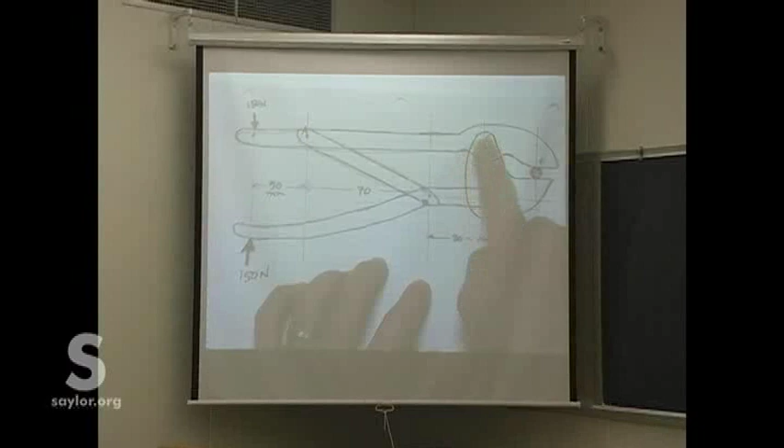I think we looked at that first, the lower part of the jaw here. Remember, what we're trying to find is how much force is exerted at E based upon an input back here by the user of 150.

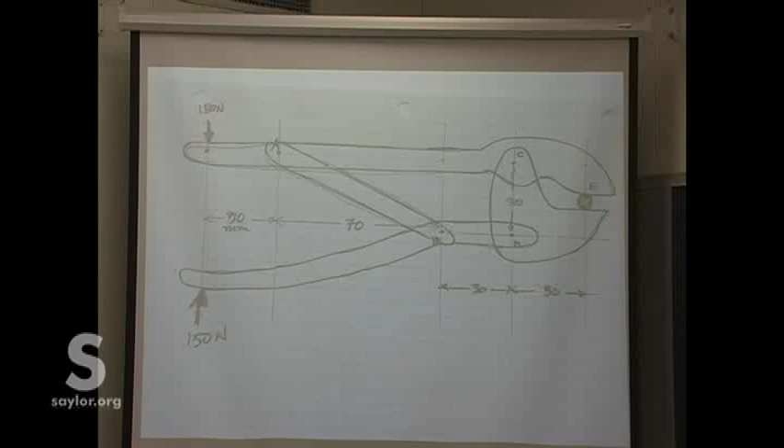So that's the deal, right? We looked at the first jaw. We did the upper part too, but we were just starting on that. My recommendation again is that you keep these parts, as you take them apart, in about the same place where they lie in the machine. You're just less likely to make a mistake then.

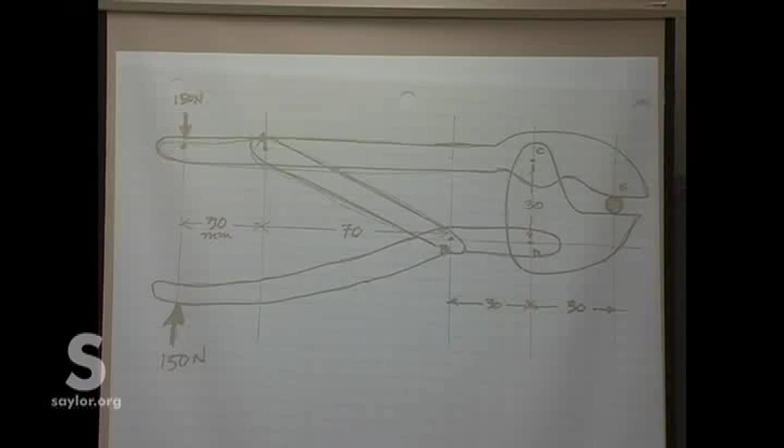So we had C and D, and we're looking for how much force it exerts at E. And we couldn't get to that because we had too many unknowns on this original piece we look at, the lower jaw. I think I put the forces like that, is that right? Remember, for the most part, it's not too crucial. Think about it a little bit, but don't waste too much time trying to get the little individual directions, because it all comes out in the wash anyway.

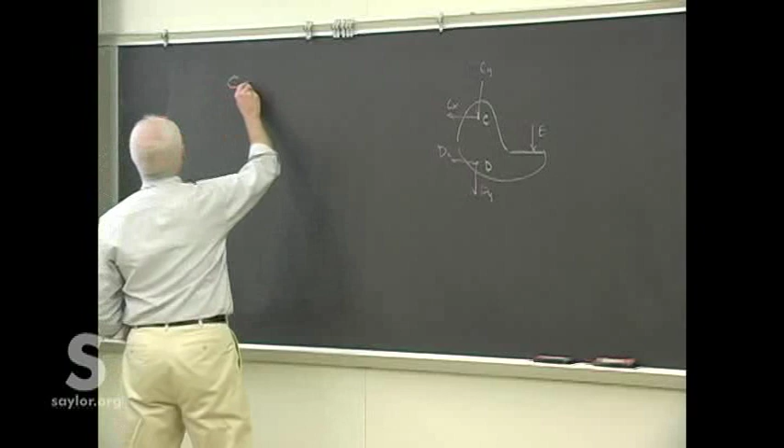All right, so now we're looking at the upper jaw, the long handle here. Oh, this thing's beautiful, you just gotta love it. And then we've got point C there again, and there's the other side of E. So we'll turn around because it's equal and opposite to whatever we've got there, and we don't have those yet.

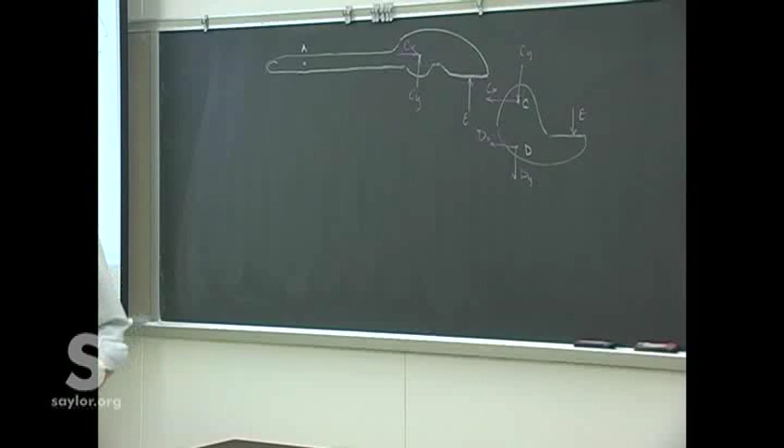So we don't have that. And then I think we talked a little bit about what was going on at that link A, the pin A, which is about there maybe. What was the deal with that one? We figured out a little bit about it, the forces that are there.

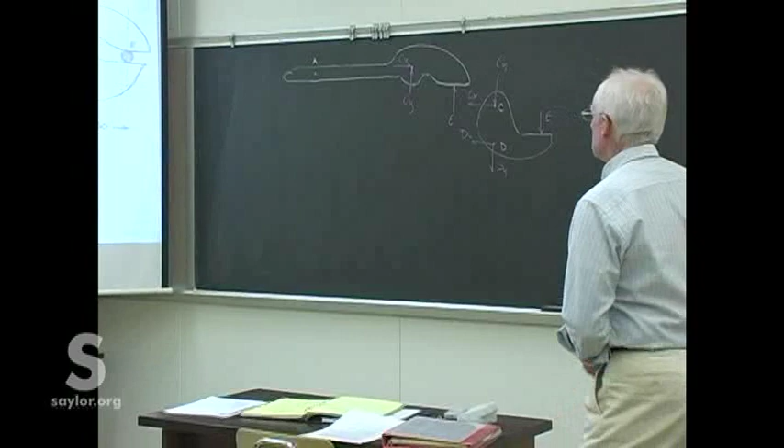It goes through the member AB. Yeah, that's a pin connection with a two-force member, which means we're going to know the inclination, I guess you could say, of that piece, because AB itself is a two-force member. So we know that the forces are going to be lined up right along there.

It doesn't mean when you go to analyze the forces at that point, if you need to, that it's not still useful to break them into their component directions. What it does mean, though, is that there's less, not the same number of unknowns that we might have had otherwise, because now we know the direction of AB. So you can still break it into the component directions if you need to, but those are related by the sines and cosines of the angle anyway, so it's not really anything we would have done differently. It's just fewer unknowns now.

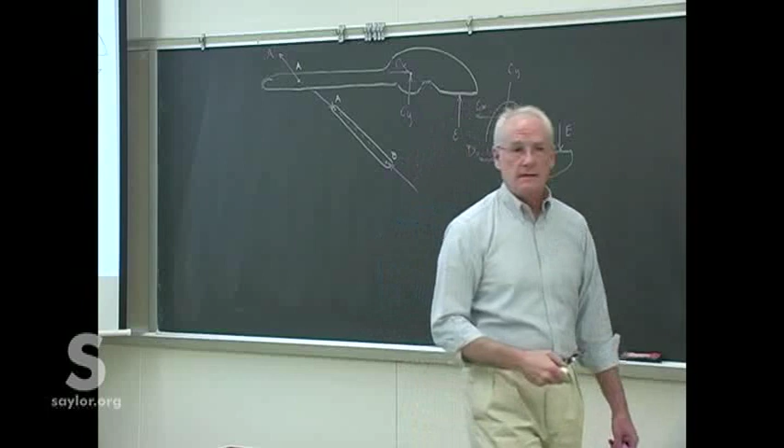All right, so I think that's where we were. Oh, there was the 150 input load there. We're trying to find out, given that, how much force is exerted by the machine at its contact with whatever it is that's cutting through it, at point E.

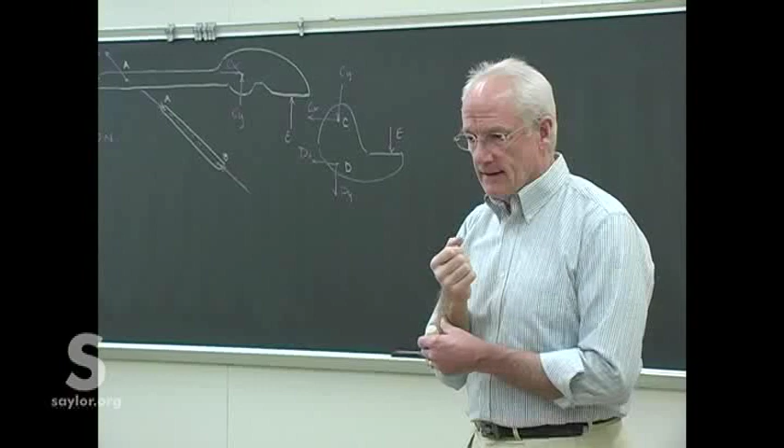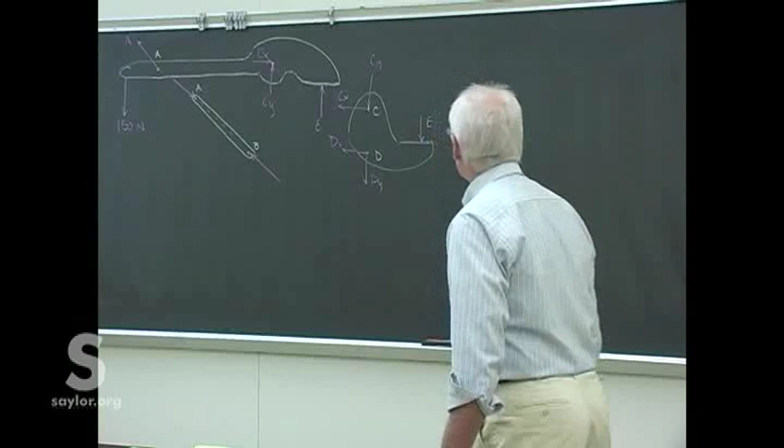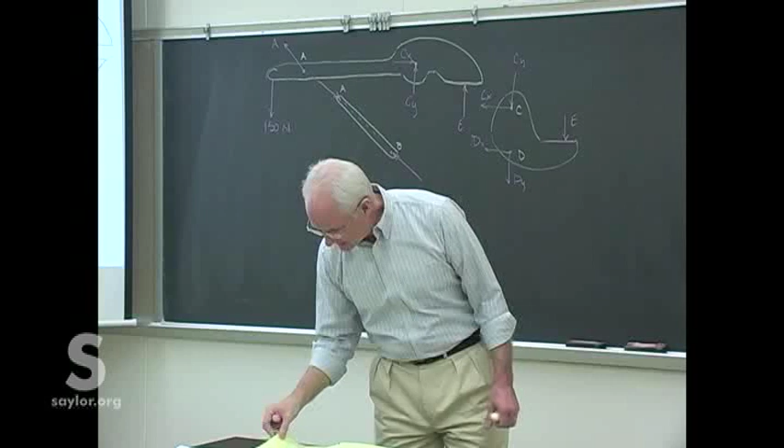So what's next? We have still 1, 2, 3, and 4 unknowns. That angle's not unknown anymore, but I think it's 23.2 degrees.

So we still have 4 unknowns with that one still: E, the direction and magnitude of C, and the magnitude of A is still unknown. So we can't do that piece yet either.

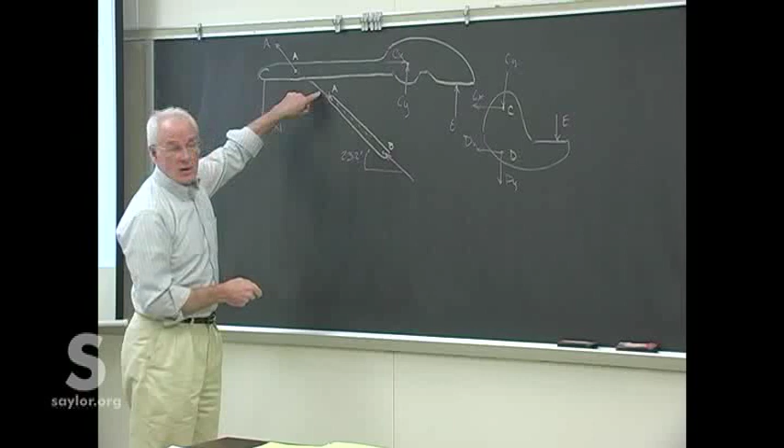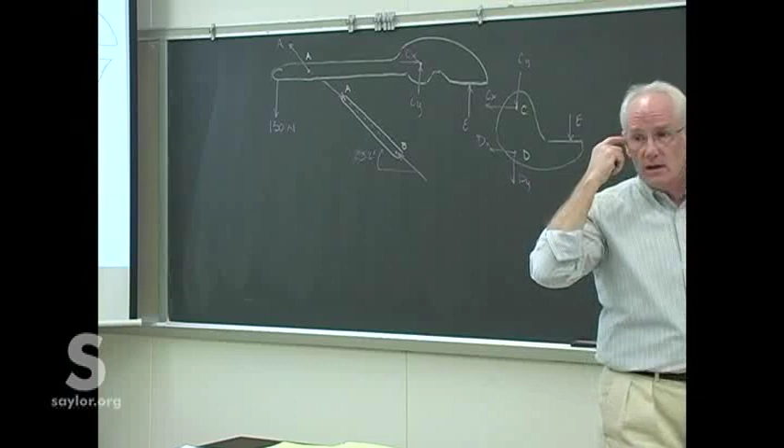So what? Do the last piece. There's only one unknown with part AB, right? We just don't know the magnitude, we know the angle. So can we do that one? Because if we knew A or B, we know that, we'd only have 3 unknowns. We could finish the part with the top jaw.

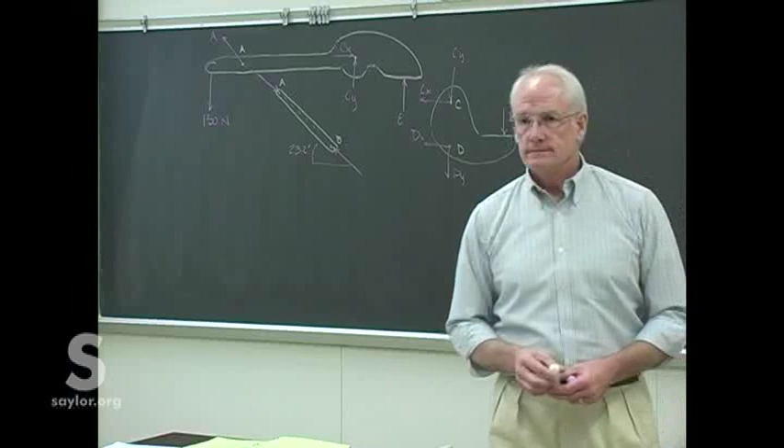Can we do part AB with only a single unknown? All we get out of AB is what we already know anyway, which is that these are equal and opposite. We don't have a moment equation we can apply here, remember? So the only two equations we have are the sum of the forces in the x and the y, and because of the nature of this, those aren't independent. So we don't have anything else we can do but say A equals B.

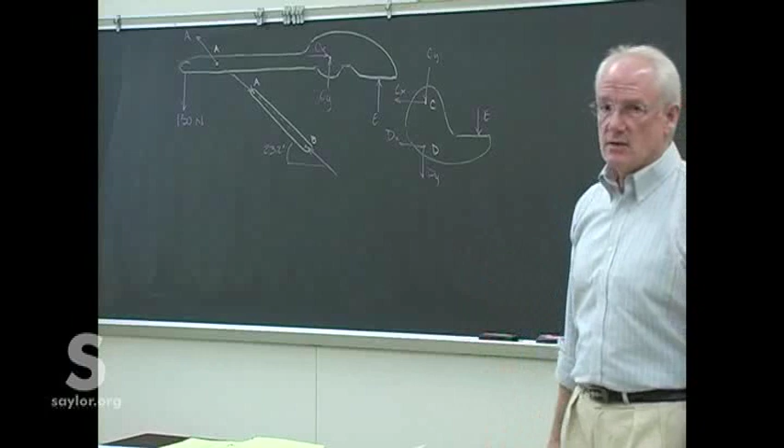Can you treat the top part of the handle as anchored and then just do a moment with the rest of the structure?

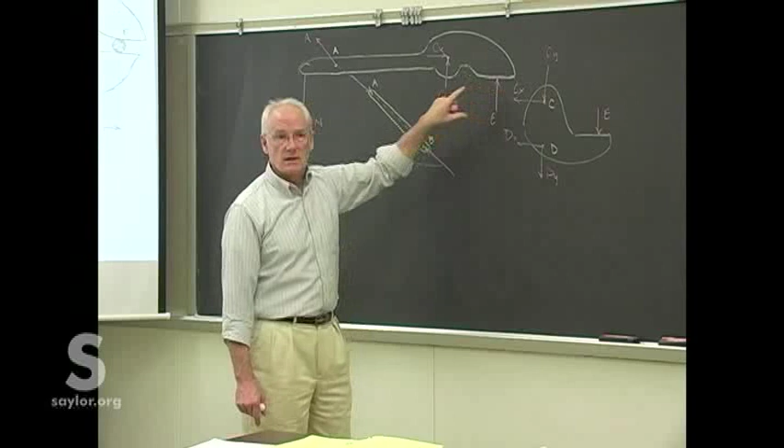Treat this as what? As if it can't move, and then just do a moment with everything else? Well, the parts can move, but we're not analyzing them while they're moving, so none of these things move anyway. We can take the moment about any point we want. We're looking for the static analysis with that load. What's the force here? Even though the parts can move, they're not moving.

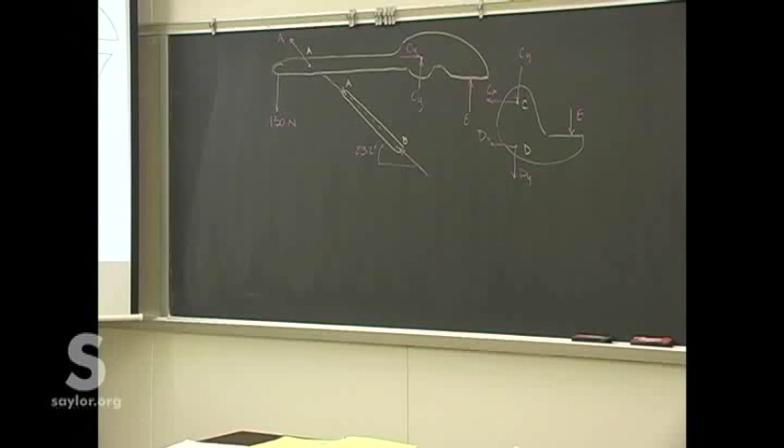I was saying use the 150 newtons with everything but the top piece and do a moment about C, and then you can get the force at A. Everything but this? Yep. And then use the other three pieces as if they're rigid, and do a moment about C, and then you should be able to get a force at A, right? At least get the Y force at A.

Do the moments about what point? C. But you still have forces at D, B, A, and E.

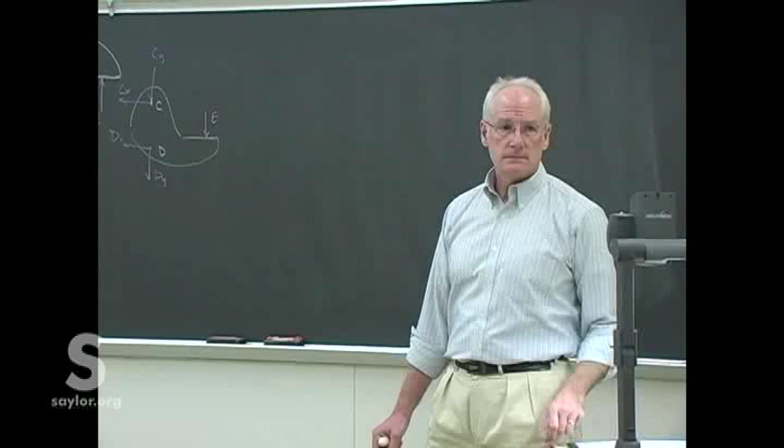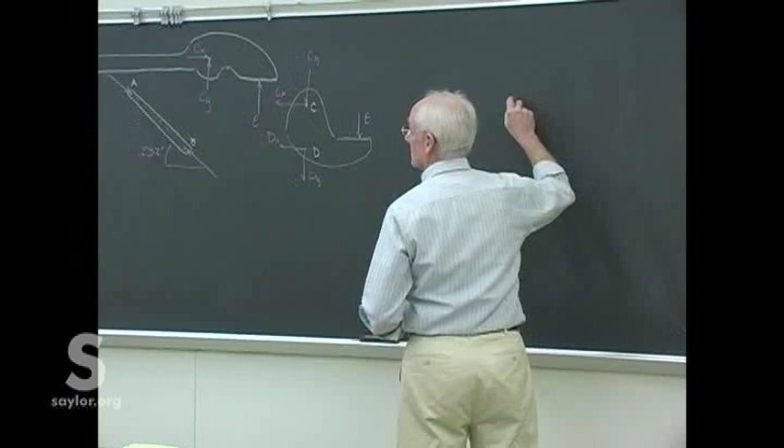Those are unknown forces. I'm just saying use the known 150 newtons to create a moment. But maybe, all right, let's see. I have to draw it to see. Okay, so we've got the lower piece, we've got the link, and then we've got the lower jaw.

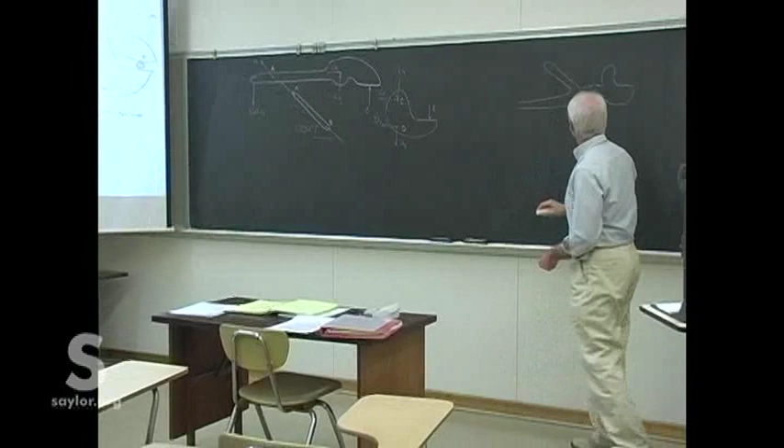So just something as beautiful as that looks, right? Yeah. So we have the 150 there, we have E there, and then we have the forces at C, and just the force at A. Right? That's what you're saying?

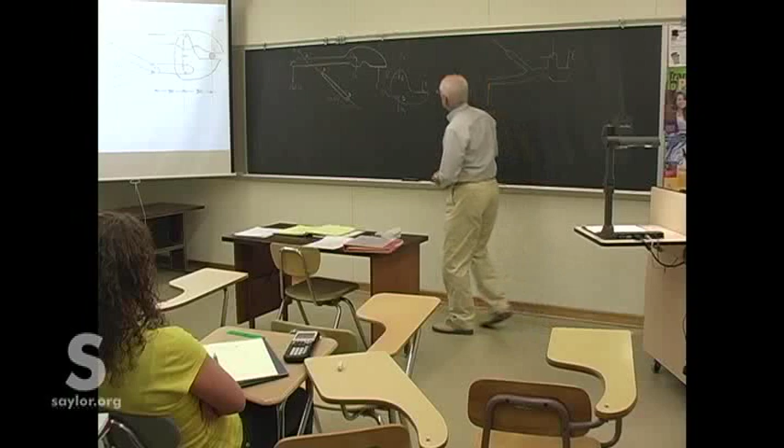Yeah. How many unknowns is that? I guess there's too many. Yeah, it's still 4 unknowns. It's a good try, but it's still 4 unknowns. Doesn't mean we might not have to come to that. Oh, wait a second.

If you were doing a moment about C, those 2 forces at C wouldn't matter. There'd only be 2 unknowns. There'd be just E and A. Oh, and then I have to draw it again.

This thing is ugly enough as it is. It's really ugly, it's just a piece. All right, so we've got the 150 there, E there. We're going to take the moment about C, so that point doesn't matter, and then we have A there. Right? That's more the picture now you're talking of?

Yeah, and then there won't be C. We don't have to worry about C if we do the moment about C. Right, we don't have to worry about AX. We have AY, E, and 150, right? AYE? What? No, you have AY, you have E, and you have the 150, right? Because the AX would cancel out because it goes through C. Why does A, oh, A, yeah, A is lined up with C.

So I can improve the drawing a little bit with that. You're right. So if we did break that into components, we only have AY. So could we then find E from that? Yes, in terms of AX, or AY.

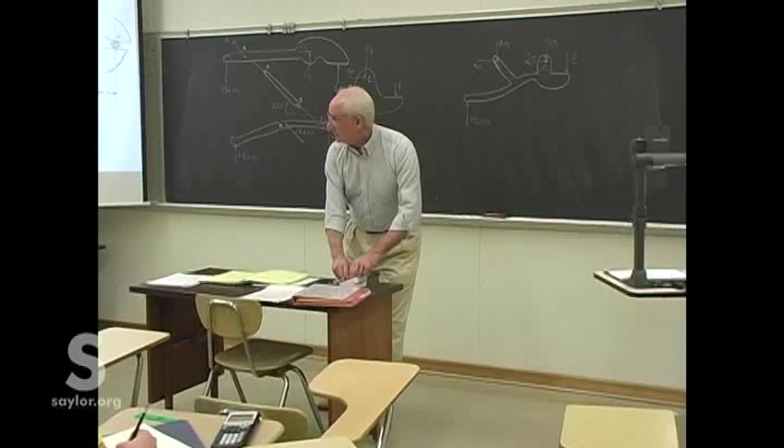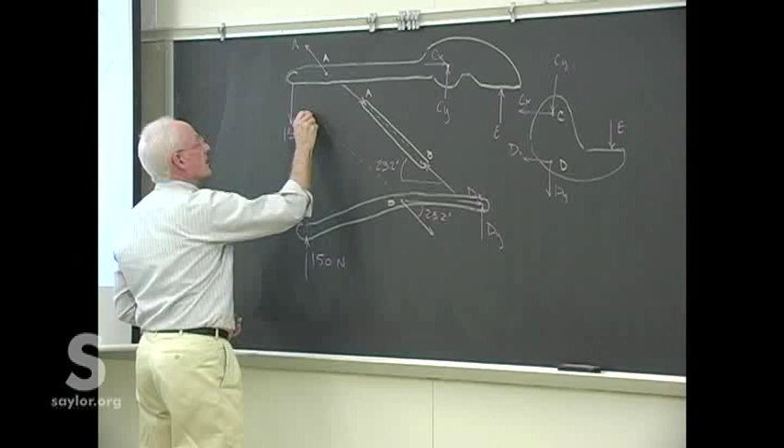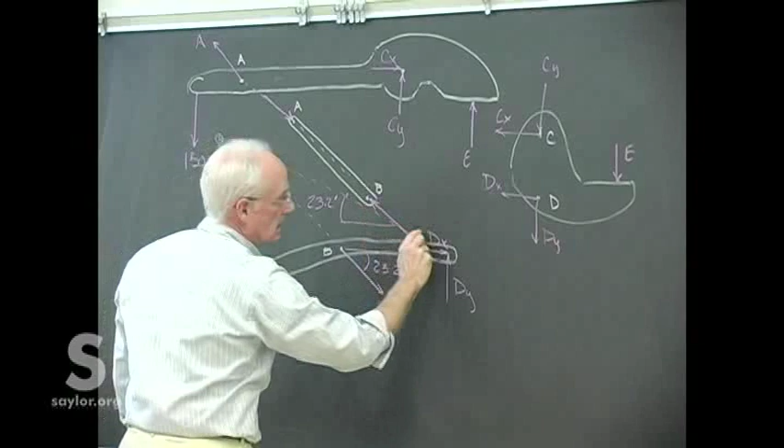You could, if you want, make a 3-force member out of this. I don't know if it's going to help much. Because remember, with a 3-force member, everything goes through a single point. All the forces must go through a single point. That, if you can find that point, would then give you the direction of the force D, and that's one less unknown. That's a separate equation you could bring in, if you will. But it's not an additional one, it's just a separate one. Because once you link those, they're not independent then.

Take a few seconds to come up with those forces at D. You can do it as a 3-force member. I don't know if the geometry's not a little bit cumbersome. Yeah, it's probably not worth doing it that way.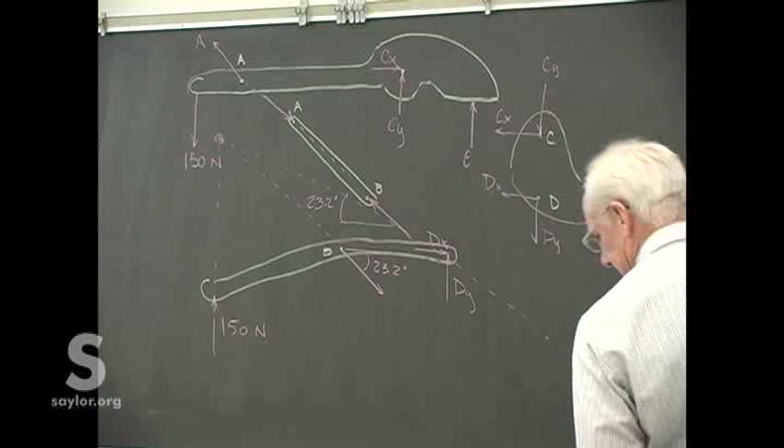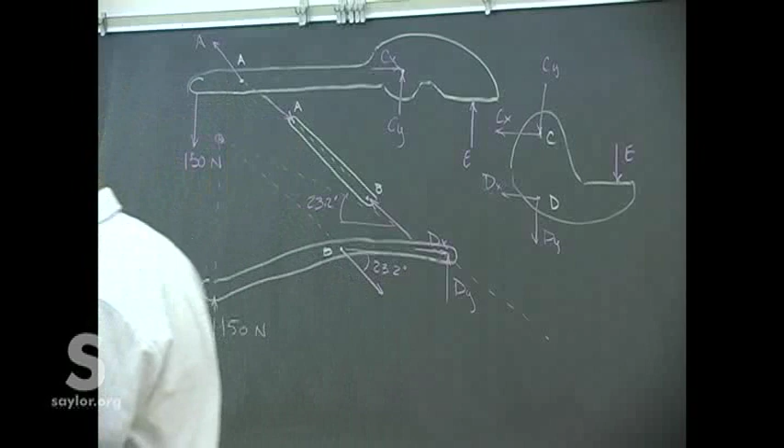Is it working? Want to check anything as you go? B? Yeah, 1650? Yeah, that's what I have too. It does not count as an independent equation, just write that down when I say it.

What part are you doing? Not a free body diagram, okay.

Yeah, we should figure that link AB in compression, as would make sense if you're squeezing the two handles together. Comes out to be about 1,650 newtons, so it's a lot of force for an input of only 150 newtons.

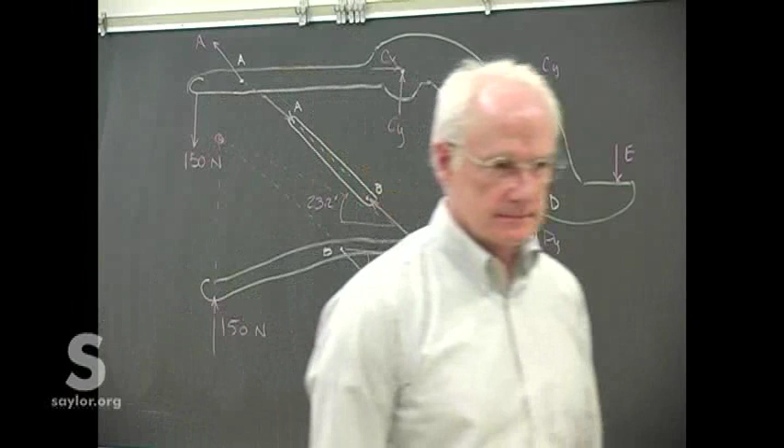E. There's the $1 million right there. I think you have enough time if you want to just run down there and get that now. Get it deposited in your account and start earning some interest.

Now, come up with a factor called mechanical advantage, the factor by which your input force was improved. And then think about the costs, because to get that mechanical advantage, you have to pay for it somewhere else. So see if you can figure out where. Figure out what the mechanical advantage is, and then figure out where that cost comes from to get that mechanical advantage. Because nothing comes free. Doing okay?

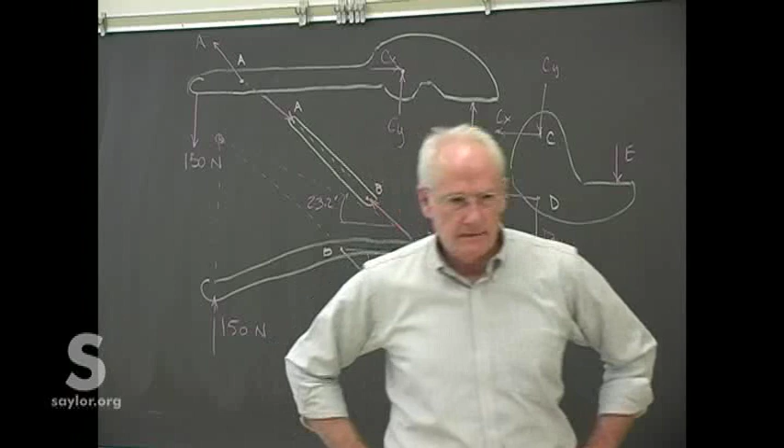Remember, we want to see with an input of 150 newtons, what's the output at the jaws at E? Find what B is, and then plug those back in. So you're doing okay? Bill, all right?

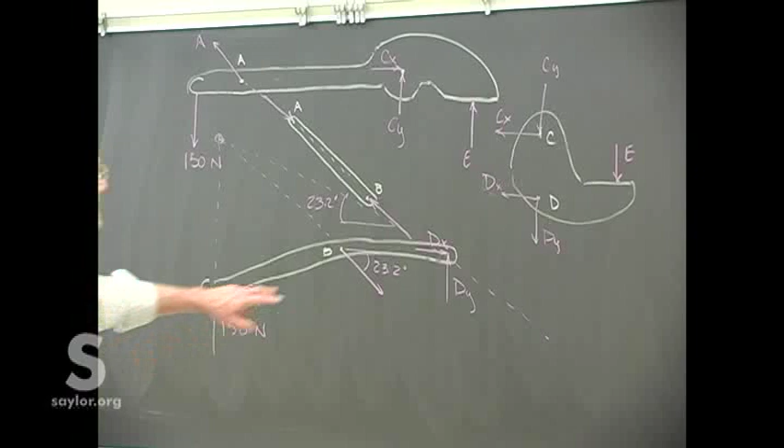Okay, if you sum the moments about B, you'll have dy on one side and the input on the other side, so you can find dy. And then in the sum of the forces, you can find the other ones until you can get dx. And then you can go to that lower jaw. Once you've got dx and dy, you go to the lower jaw and sum the moments about C, and all you'll have left is E.

If this was your design project, you'd still want the forces at C. So doing something like that for the question, we don't need them, but for the project isn't good enough, we need more. Yeah, you need either more parts, like that thing has more parts, plus this has adjustability to it that must have some factor.

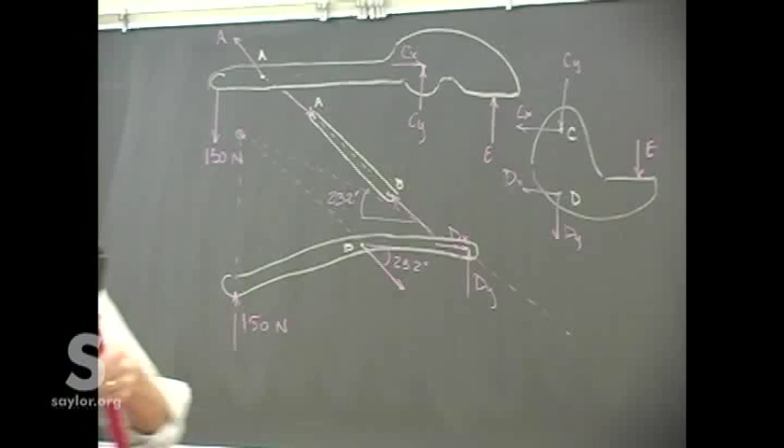Probably has to do with, for a wider separation there, you adjust it to keep the jaws parallel. Because if the jaws aren't parallel, then the tendency is for the piece to try to squirt out, and there's got to be some friction force holding it in. You're going to have to take into account that too.

Plus, if you do for different angles, because this is just one setting we have here, but you can put all kinds of different pieces in there, so there's a lot more. You want that? It's tempting. That's why we have this permanently set at a low setting, so you can't actually... oh wait, maybe you can get your finger in there.

Does it work now? Where are you now? Same.

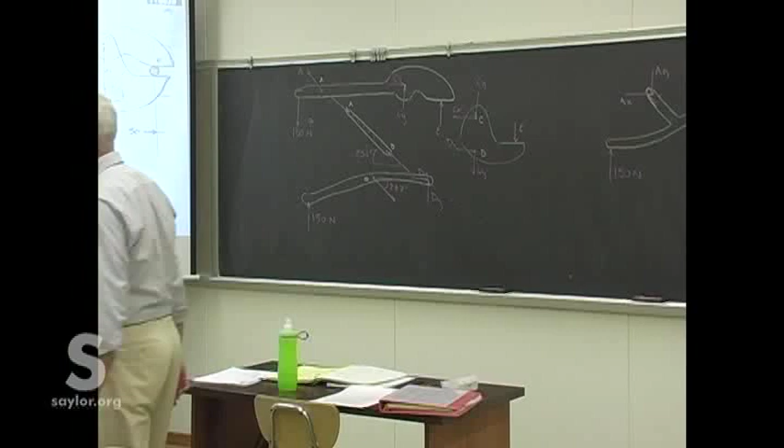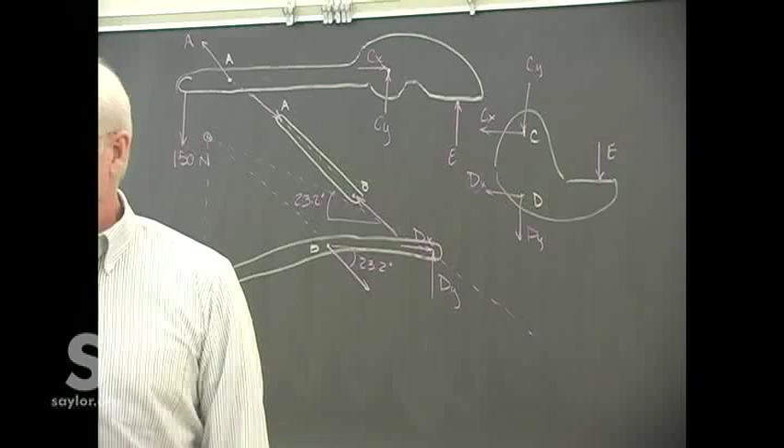This one's nice because you can get all the dimensions off of it without a lot of trouble. You can always go buy something from Lowe's, take the dimensions, and then take it back. A couple of you probably have stuff like this in your trunk anyway. I have the same bolt cutters at work. Very good at removing rusty chains.

Is that what you? Yep. Now, what's the mechanical advantage?

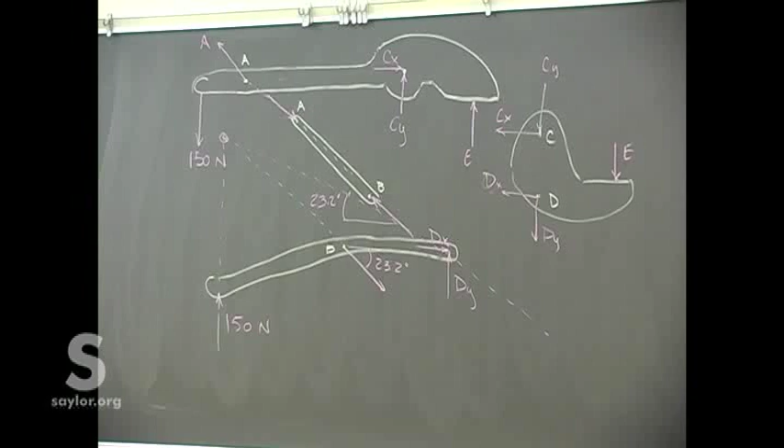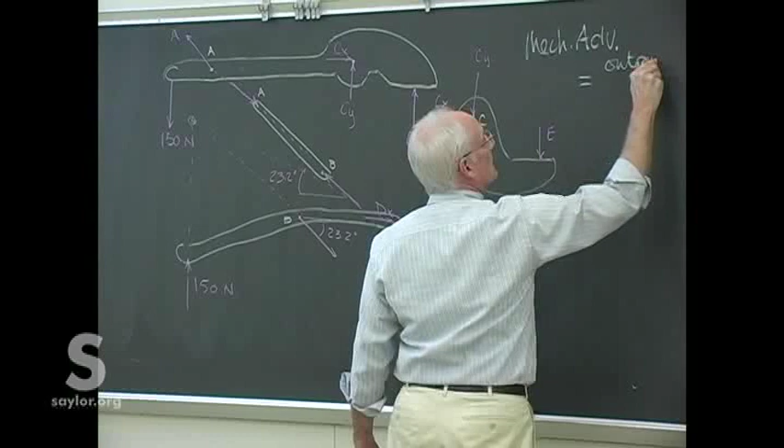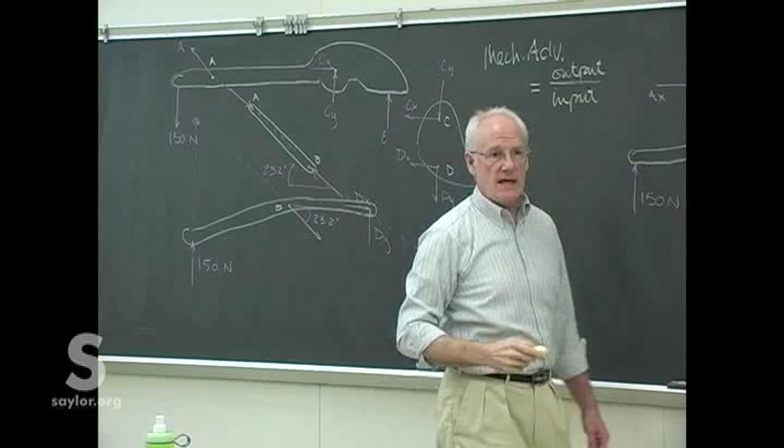Where do you have to pay for that mechanical advantage? The mechanical advantage is the multiplication of the input to get the output. We don't really have a symbol for it, but it's the output, which is what you get at E, the reason we're doing this, divided by the input. Usually that's greater than 1, because you want to take the relatively feeble human hand and turn it into many, many times that force on the piece.

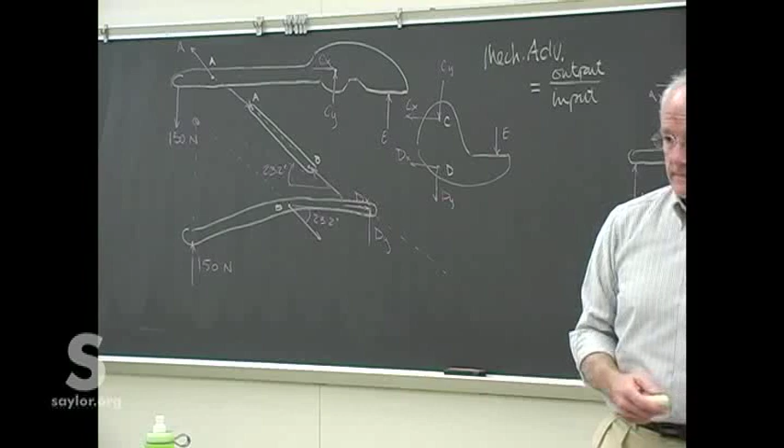However, there's somewhere where you have to pay for that in some way. I use the word paying. For example, you've used a block and tackle before, and you put a certain amount of force on the chain, and you multiply that force a lot so you can lift something very heavy. But to do that, you got to pull a whole bunch of chain. In fact, it's by the same factor. If you lift something 10 times, then you're going to have to pull 10 times as much chain.

So it's the same kind of thing here. However, like with a block and tackle, sometimes that cost is more than worth it. It's kind of a pain to pull all that chain. You gotta use 2 hands for this.

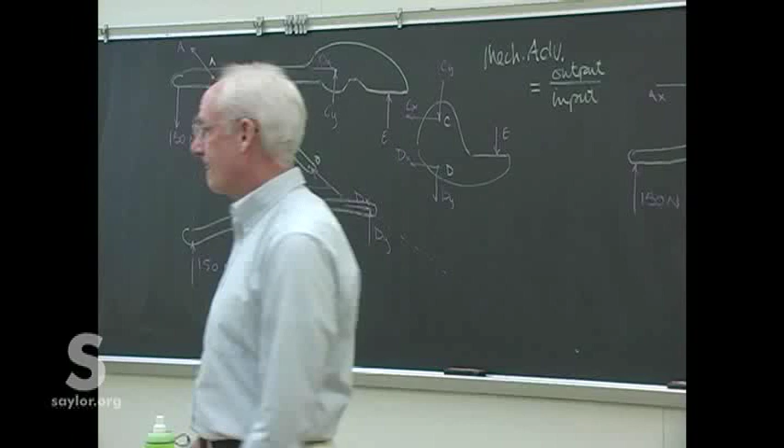No, that's your cost. Yeah, right, because it's too far apart for one hand. Well, not in real bolt cutters, not handheld, but the ones you have over there. You can't use that with one hand. Put it across the bolt. Put your hand in there. Okay, Trevor, he wants your finger in there. Put it across the bolt.

Well, yeah, kind of, that's the cost. We'll talk about it in a second when we have the numbers. Bill, you got something? Got some answers there? Almost? Dana? Almost? So we got a couple people coming up with the right numbers. So we've got the mechanical advantage now. BJ have it? BJ has something else.

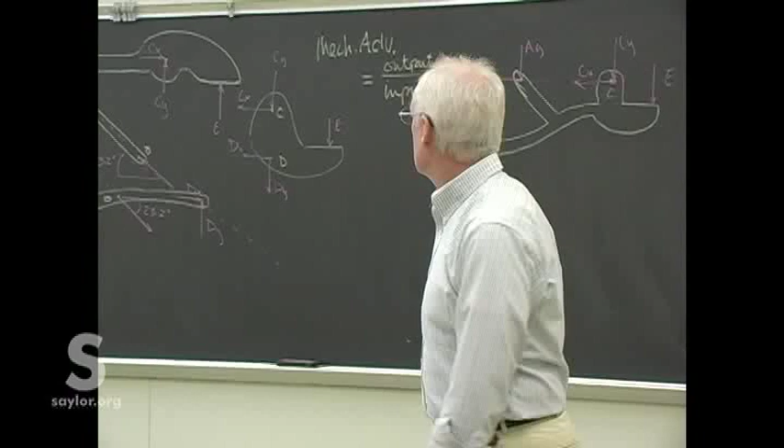Let's discuss this. The advantage is just, now there are situations where you might want it decreased if you're doing something very sensitive, like if you have a pair of calipers and you're trying to lift a blood vessel during surgery, you don't want to smash it. So you don't always want the multiplication. Yeah, I lost my medical license too, too many smashed blood vessels.

Well, I said yesterday about moving point D back. I think with these bolt cutters, point D won't be directly underneath point C until the bolt cutters are closed. Up until that point, it's to the left of C so that you get the mechanical advantage of dx or dy. Right now, you're only getting dx. But if you move it back, the mechanical advantage will go up a lot.

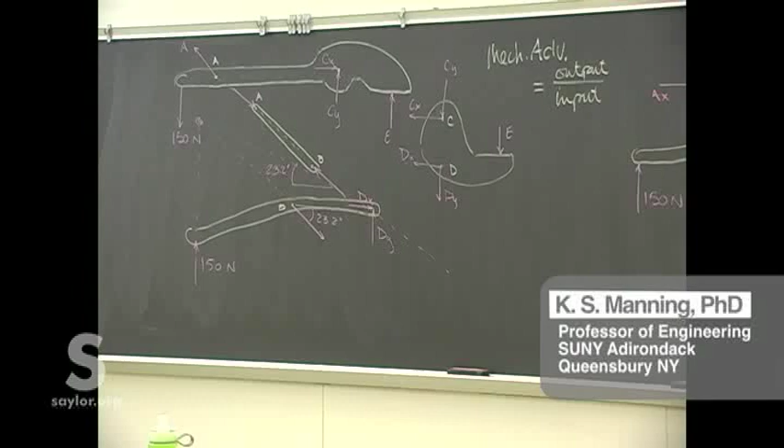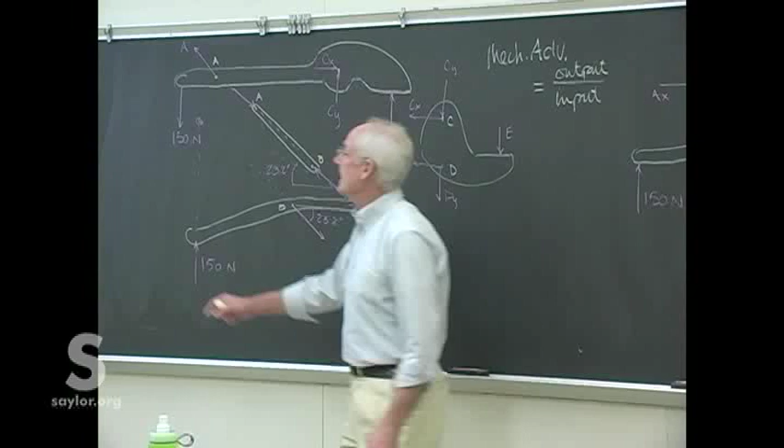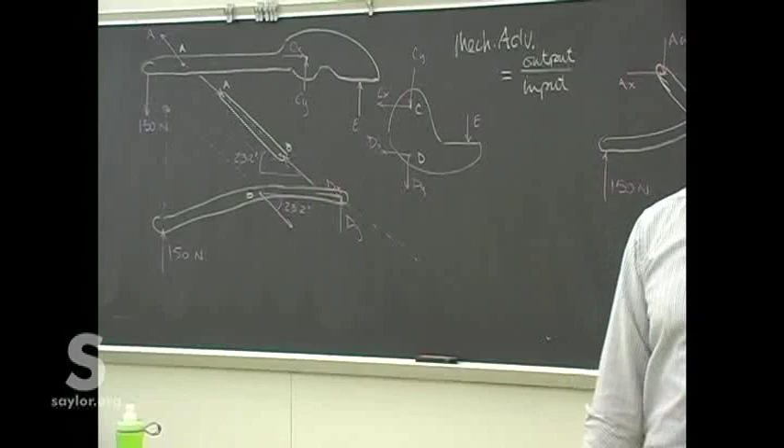If D moves to the left, yes, because then you get a moment using the entire force. No, that'd be the wrong way, because this would be down. It'll be moving it down, over, and it'll add to the moment about C. And I think with real bolt cutters, it doesn't actually come directly underneath the other pin until the bolt cutters are closed. Well, these are my bolt cutters.

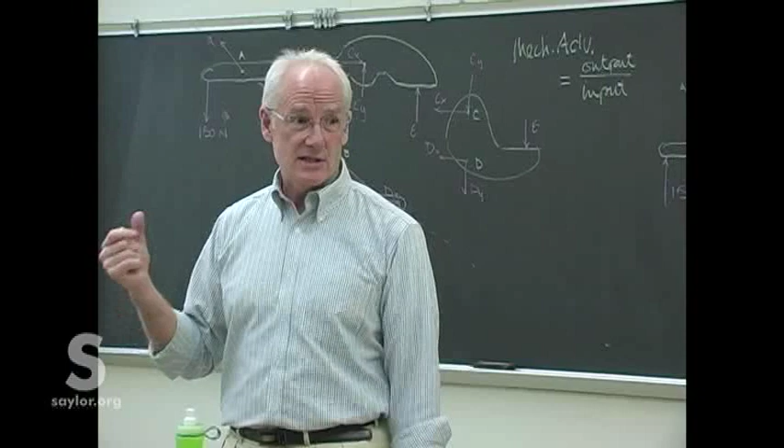Plus, you don't know if we're trying to cut the thing at E or just hang on to it. Pliers only hang on to things. If you're looking at vice grips, their purpose is just to hang on to something. And so that's different than if we want to cut it.

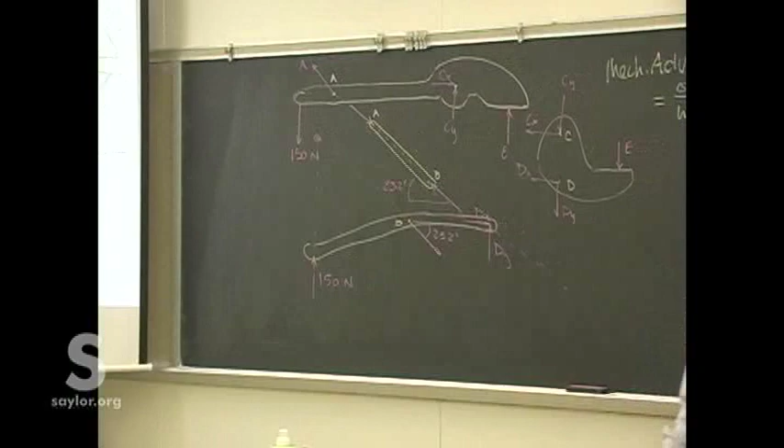And there's another thing you have to do with this kind of project, and we'll talk about it in a couple weeks, is the fact that if you're trying to cut through something, we have this wedge shape, and we're going to talk about how that works as well in a couple weeks. So that's something that would come into account if you had cutters instead of regular pliers.

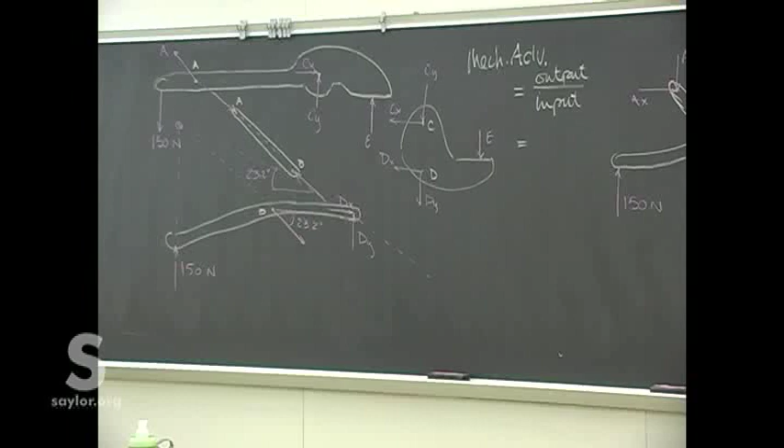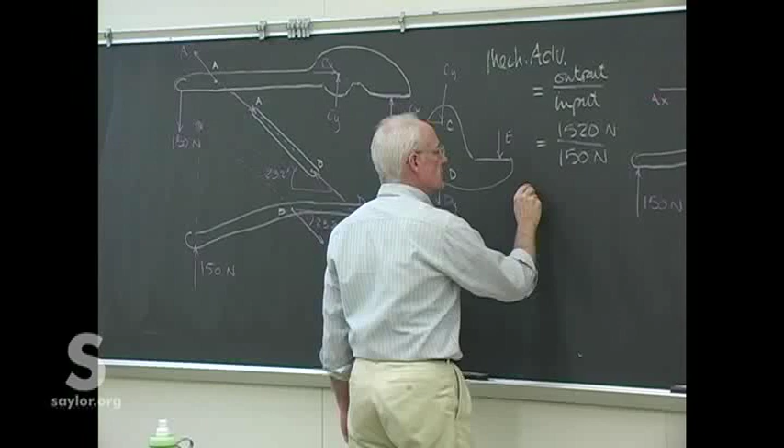All right, so I think we're pretty much there. Dana, did you get it finally? So it looks like something around 1520 newtons, give or take a little bit, for an input of 150, so a mechanical advantage of a little over 10. Meaning that for every newton of input, there's 10 newtons of output. Actually, it doesn't even have to be newtons, it could be pounds too, it works just the same.

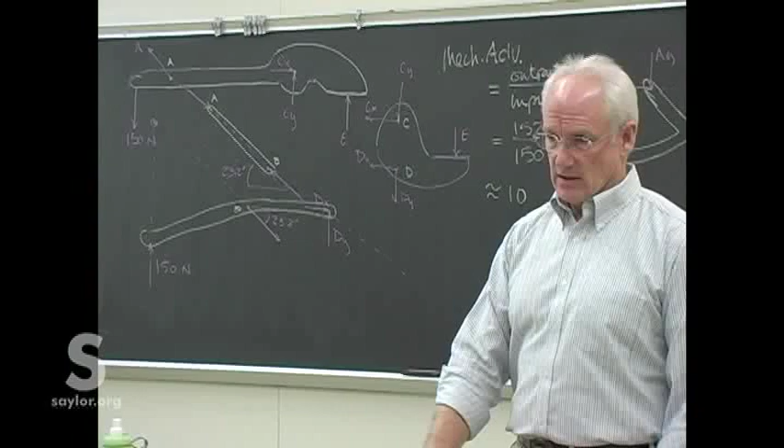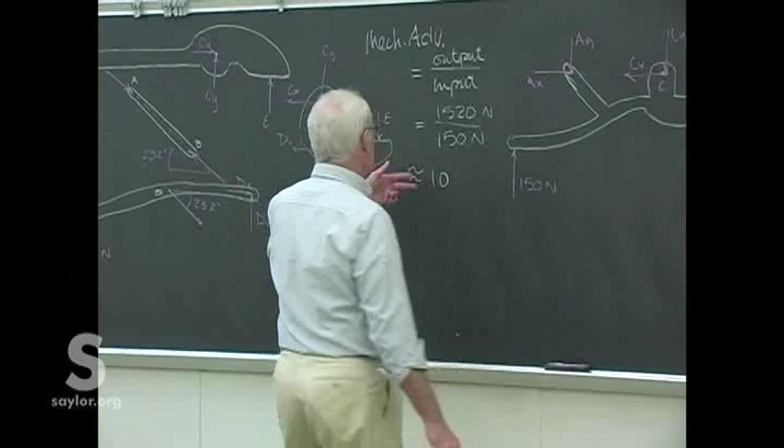Is that what we did with the suitcase thing? Yeah, kind of, but that was just a simple lever arm. You have the long handle that could lift 150, and it's down closer to the fulcrum because your hand's way far out. You don't have to lift it with 150 pounds, I think it was. And there's a cost of 10 somewhere in the use of this thing.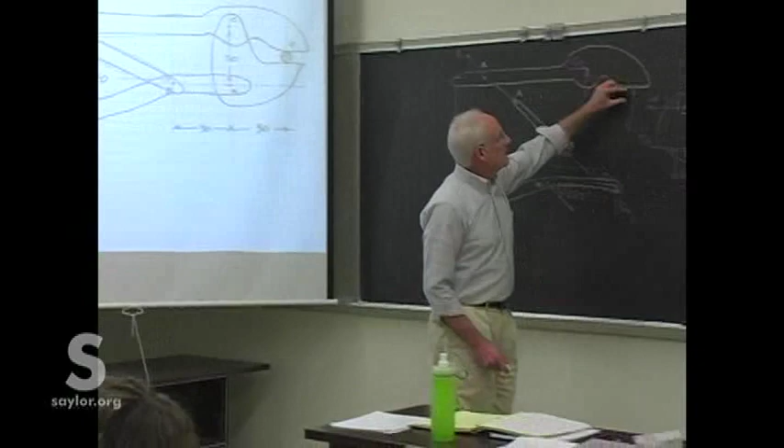And it's that for every unit of closure of the jaws, you're going to have to move the handle 10 times that. But if that's what you need, if you need that 1,500 newton output, that's not much cost at all. So you're more than likely willing to put up with this.

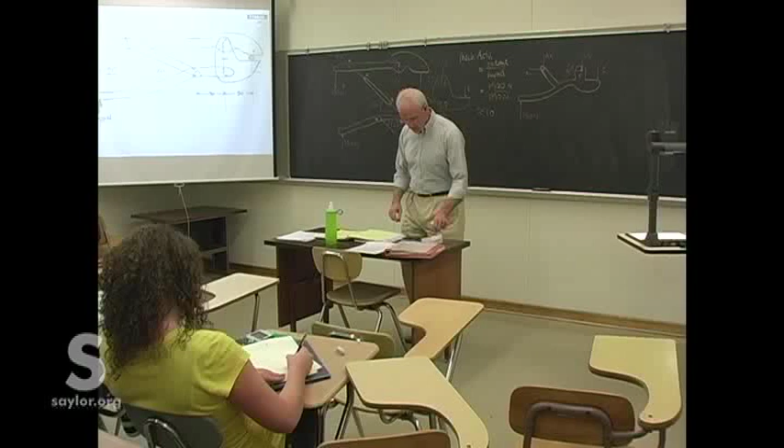Okay, any questions for the next thing we can look at? All right, this will be our last machine. I'll leave it to you.

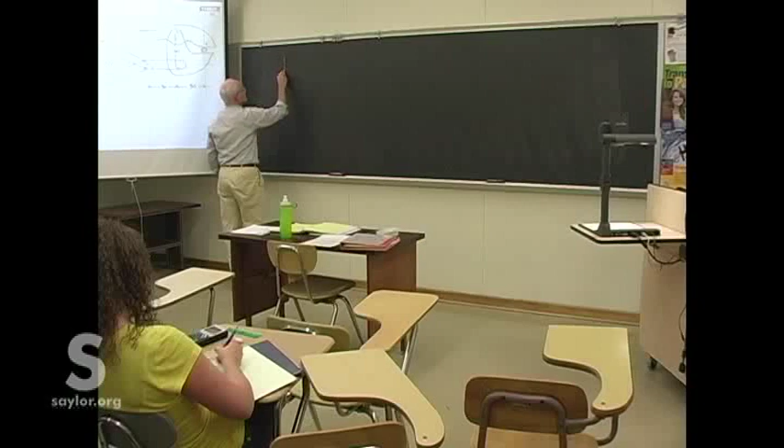Bonus points, however, if you do it with... how should I put it... if you do it with a force triangle. Maybe I'll just leave it to you to figure out what that means at first.

So imagine we have some kind of trap door thing, and it's run by a hydraulic actuator, something like that. Simple trap door, half a meter on either side. Label these A, B, and C. This actuator is capable of applying 6 kilonewtons, and it's conveniently at 45 degrees.

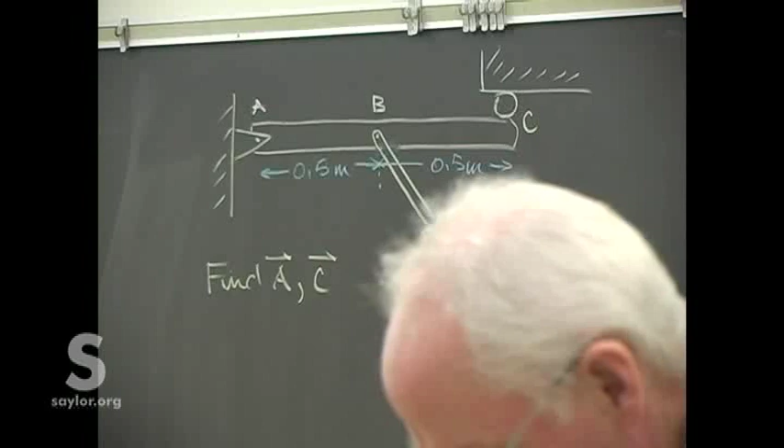I broke B into its components, but I don't even know if that's right, because I don't know if I can assume that that's just 6 kilonewtons.

What are these? These are for my moments. For your sum of the moments? Or are those moments around that point? Directional moments around that point, caused by the force of the 6 kilonewton force. Be careful, forces do cause moments, but if you have both in there, you change the problem. You can have one or the other, but if you have both, you change the problem.

Just look at the answers, don't look at the rest, it'll scare you.

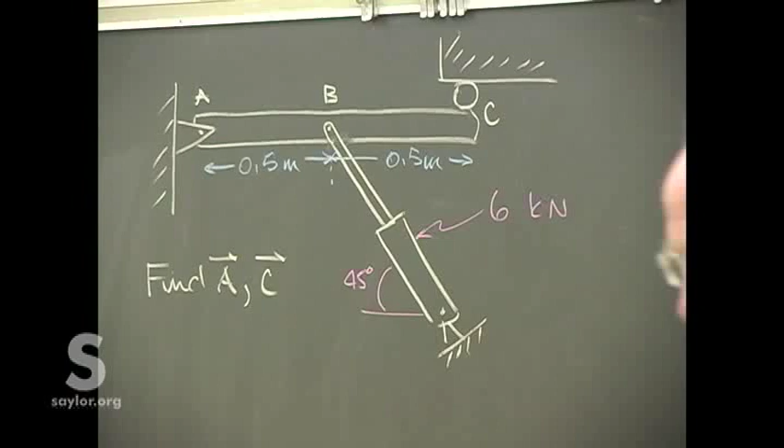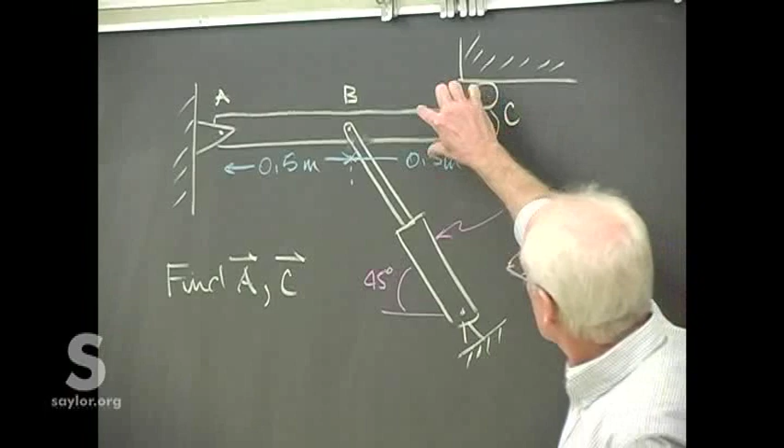Oh, you guys make it so hard to find the answers. I put a box around it. No, yeah, but I don't know, I have to see what that means from drawing.

Your drawings are... you took technical freehand sketching, why aren't they better? You gotta talk to those professors. I know.

Okay, I think so, well, as best I can tell. Some of those might have just kind of been done in my head. Combination of handwriting analysis.

What am I missing? I got the degrees, direction, what am I missing? Well, what's this, for one? I said don't look at this, just look at my answers. Are they right? I don't always fill in all that stuff because I kind of go fast, you know. Yeah, well, and then you finish early. But is it right? Instead of spending the time filling in what's missing because you went fast, you spend the time defending it. Well, I'm an artist, so I can see things on the page that you don't see.

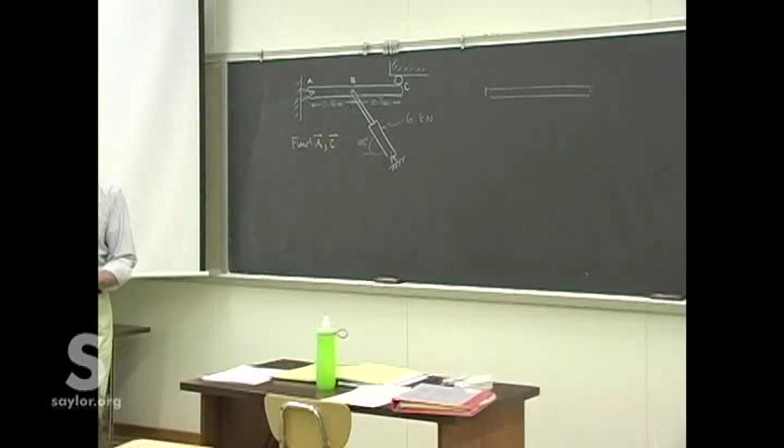All right, so most of you have a free body diagram of the door itself, which is what we're going to need because that's where the forces are. Most of you got that the actuator is a two-force member, because no matter what its length is or what force it's applying, it's still only pinned at either end.

So that's a two-force member. Call that B, I guess. And we know its angle. At A, we have a simple pin. And what do we have at C?

Meaning, what kind of force does that exert on the door, ABC? The point of the roller is that there's no lateral force then, there's only a vertical force. So that's all we have at C then, is just that piece. And then the other part, well, we can at least get AX would do that, and probably AY does that, because that actuator tends to lift the door up either way.

So, would this be? Nope. Not. No, I don't think so. No, not what I'm getting.

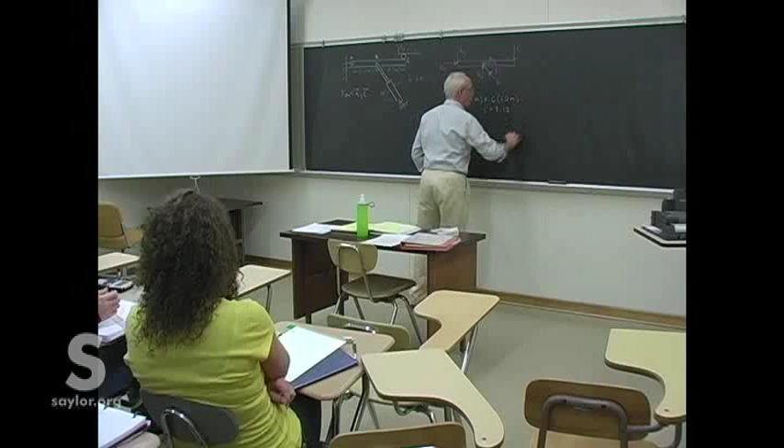I had that, but then I figured... right? You got that, BJ? Yeah. And then, now that you have By and C, you can solve for AY. And you get AY equal to, also equal to 12.

Now, that's one way to look at it. Another way to look at the problem is to realize that all of the forces must sum to 0. And you know the direction of 2 of them, and there's only 3, which means you can draw the force triangle that represents that, and you can solve for it. Not necessarily a better way, not necessarily an easier way, just another way to look at the problem.

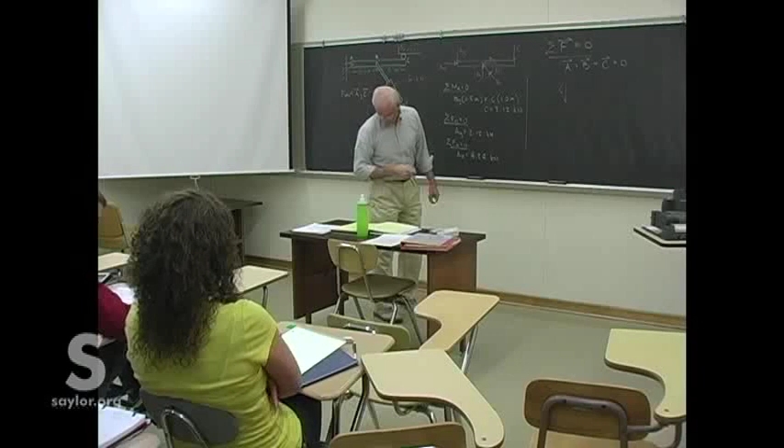So we don't know which angle A is going to be, but we do know which angle C is. And we know that all 3 added together is going to equal 0, which means A plus B, well, what's the easier way to set this up? Oh yeah, B we know is 45. So we know that's 45, and we know how long that is. We know that that would be drawn to scale as 6 kilonewtons.

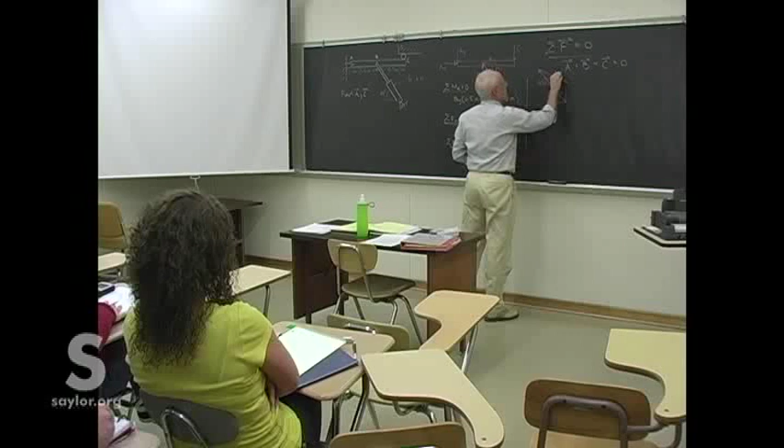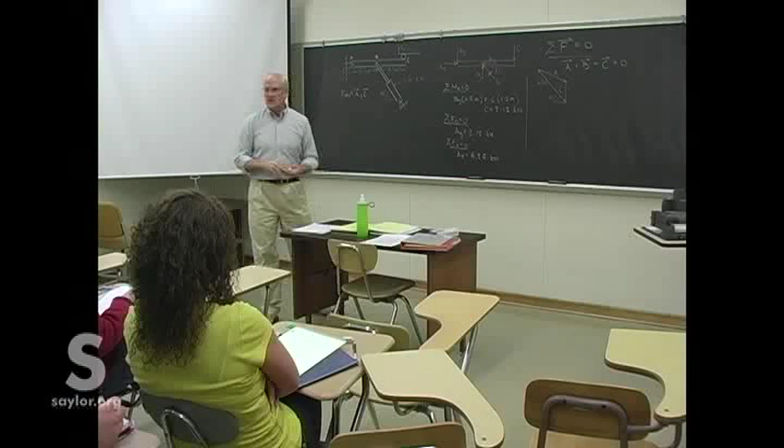And then A must close the triangle because otherwise they don't sum to 0. And then when you've got that, you can use the law of sines and the law of cosines as needed to find any of the parts that are missing.

That's what you were talking about, you thought I was trying to make the force triangle with that. That was just my A triangle. Oh, my A force triangle. Oh.

I hope you people understand what I go through when I bring down... just trying to get the papers, just trying to get the answer. I know the answer's in there somewhere, I just have to dig and dig and dig, but it's usually in there. All right, any questions?